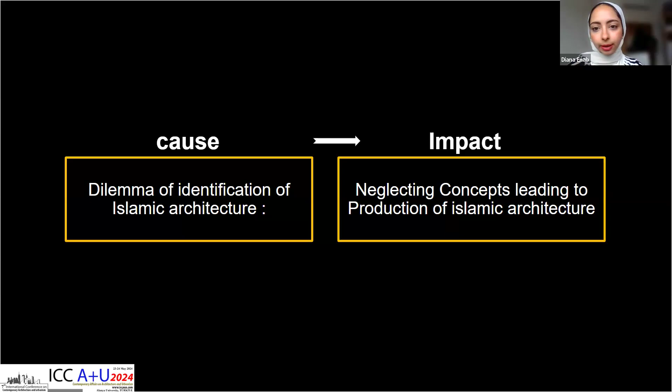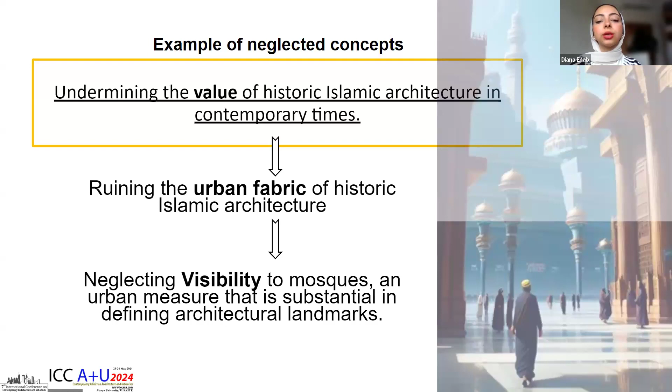So since we've got a dilemma of identification of Islamic architecture, this would assure having a negligence on the concepts leading to the authentic production of Islamic architecture. And an example of these neglected concepts would be undermining the value of historic Islamic architecture in contemporary times, which in other terms can be referred to as ruining the urban fabric of historic Islamic architecture. And among the urban measures, visibility comes to be substantial in defining architectural landmarks, especially to users and viewers of the space.

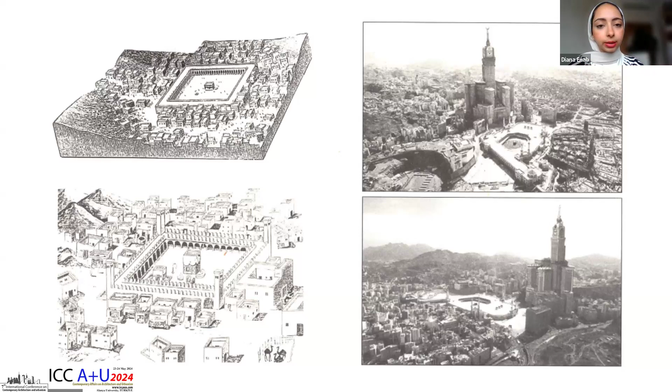And when we speak about visibility of mosques, it is inevitable not to mention the critical writings of Dr. Ali Abdel Raouf in his book From Mecca to Las Vegas, when he spoke about the transition of Muslims' priority from perceiving and getting closer to the Kaaba from the ground to overviewing the Kaaba from the top while accessing one of the highest towers located in its contemporary surrounding context. Similarly, the Galata Port Waterfront Development Project located in Istanbul is creating a visual barrier and preventing Nusratiya Mosque from its right to be visible from the coast.

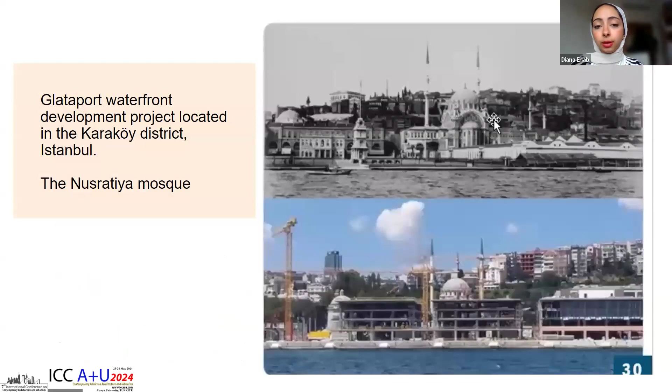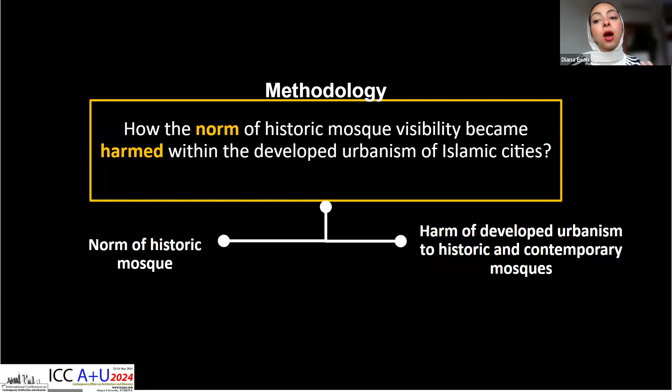So all of that comes to be wrapped up in a single question, which is how the norm of historic mosque visibility became harmed within the developed urbanism of Islamic cities. And in order to have an answer for this question, this study develops a comparative methodology of comparing the norm of historic mosques versus the harm of developed urbanism to both historic and contemporary mosques. And the case chosen for conducting the study is Nablus city, located in the West Bank. And the reason for choosing Nablus is because of its topographic nature that would alter the visibility of mosques in a radical way. So in this study, Al-Nasr Mosque is used as a historic mosque, and it will be compared with the contemporary mosque of Kawthar.

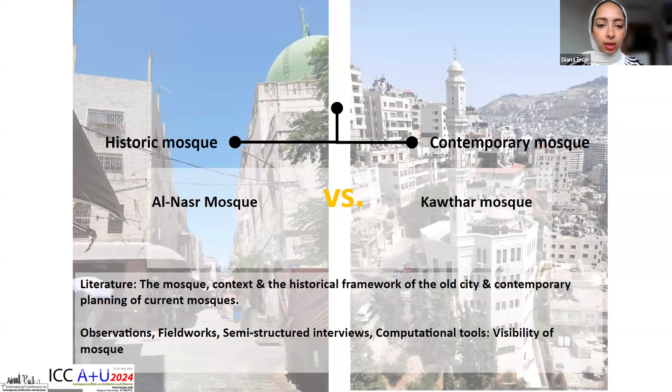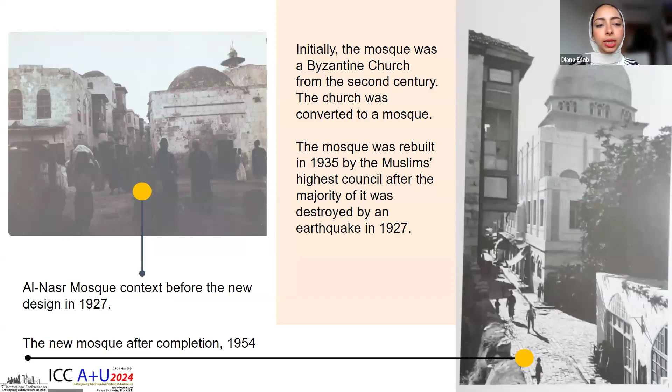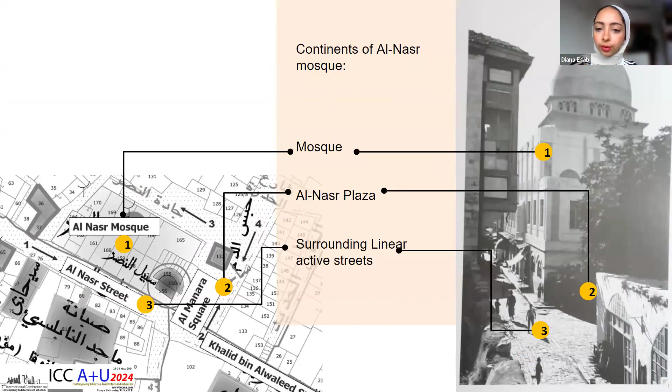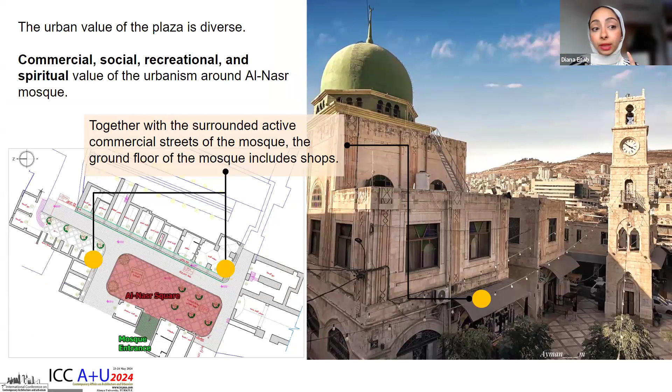So to start with, Al-Nasr Mosque is located in the center of the old city, particularly in Al-Qaryon quarter. Initially, the mosque was a Byzantine church, and then it was converted to a mosque. It became its latest form in 1954. And the contents of Al-Nasr Mosque are not restricted to the mosque itself as a building, but include Al-Nasr Plaza or Al-Manara Square in front of it, and it is surrounded by linear active streets. And the urban value of the plaza becomes diverse in that it includes commercial, social, recreational, and spiritual value.

So sometimes we see the square operating as an open-air prayer plaza or a public gathering place or place for school activities or commercial vending, etc. So the activity of the plaza and the activity of streets around the mosque, of course, would increase the number of viewers and create diversity in terms of views. However, due to the intactness and compactness of the urban fabric of the old city, the mosque visibility becomes restricted to the old city itself, and the visibility to the expansive fabric of the city becomes very shallow.

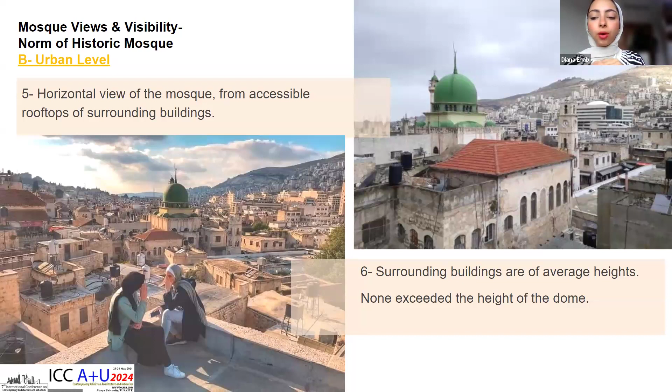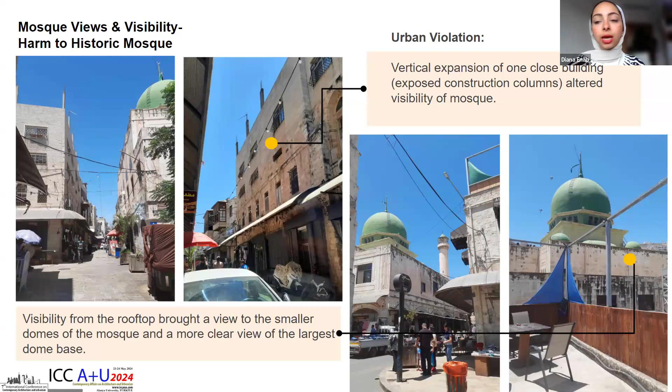In terms of urban level, the mosque gains horizontal views from the accessible rooftops of surrounding buildings, and those buildings are all of average height, so none of them would exceed the height of the dome. However, what caused the harm to historic mosques is the urban violations in contemporary times. So we've got the vertical expansions and the accessibility of some rooftops of buildings opposite and close to Al-Nasr Mosque, and that would alter the visibility of the mosque.

And in order to compare the results obtained from the observations, the fieldwork and the semi-structured interviews, they were compared with the measure of visibility using some computational tools run by plugins in the software Rhinoceros, specifically Grasshopper.

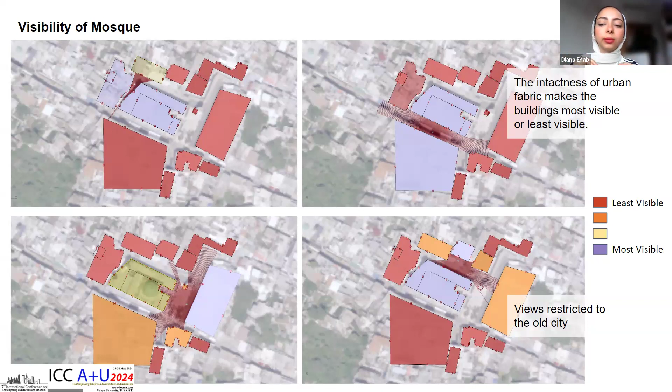So in this computational tool, four locations were pinned around the mosque, depicting its four sides or its four facades. And the results showed that the intactness of urban fabric makes the buildings either of most visibility or least visibility. It also proved the notion that views are restricted to the old city itself.

Another computational tool showed that the highest visibility of Al-Nasr Mosque is at its roof, thanks to the expansive contemporary urban fabric, and that the facade facing the plaza would be the next most visible facade in Al-Nasr Mosque.

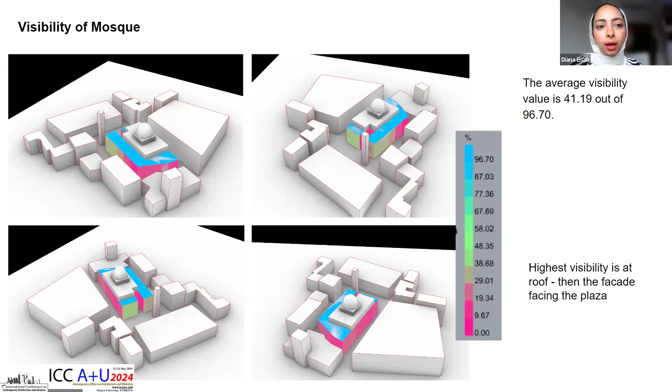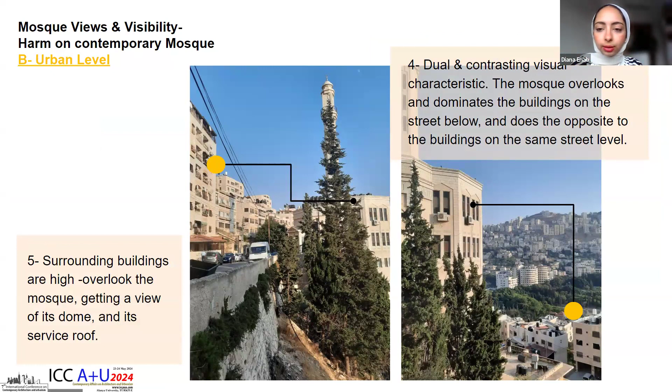Also, the lack of open spaces or plazas in front of the mosque would lower the visibility for passers. In terms of urban level, surrounding buildings are high and they would overlook the mosque. There was also something interesting to tackle, which is the dual and contrasting visual characteristic of the mosque. Sometimes it would dominate the buildings on the street below, and sometimes it does the opposite to the buildings on the same street level. So there's a contrasting dominance, I would say.

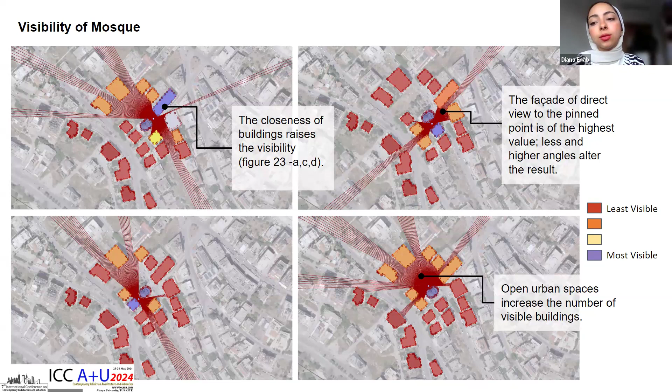Results of the computational tool show that closeness of buildings raises the visibility, and that the facade of direct views to the pinned points is of the highest value. Lower and higher angles would alter the result, and open urban spaces increase the number of visible buildings. This is a close-up on how the computational tool shows the result of visibility: it does not only evaluate the visibility of surrounding buildings to specific points graphically, but it also evaluates the facades of those buildings numerically.

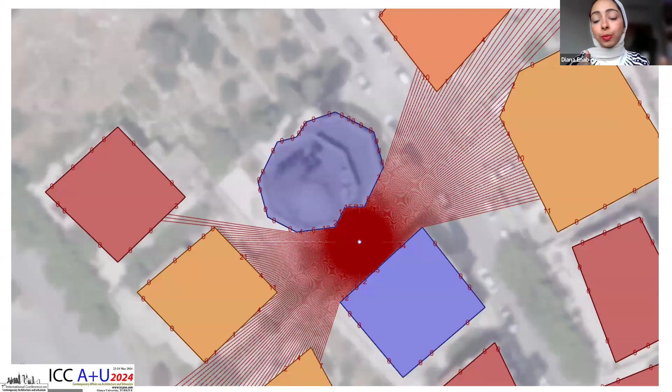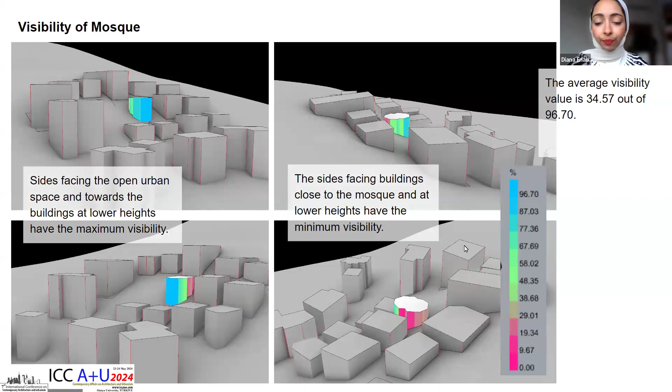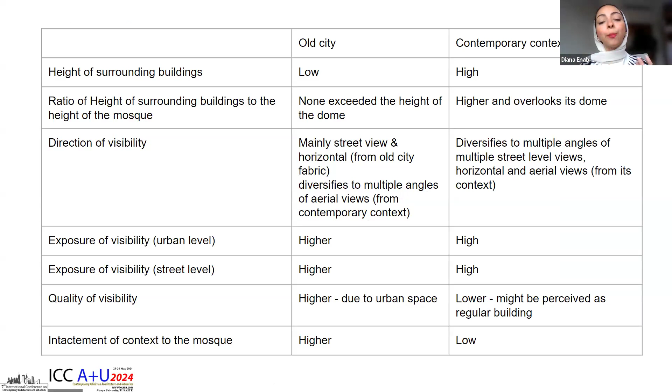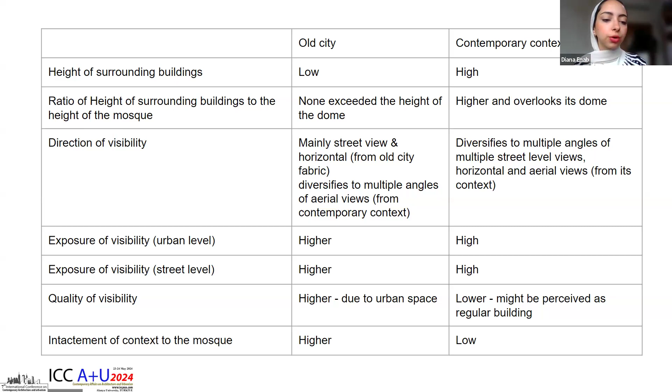Results also showed that the sides facing the open spaces and towards buildings at lower height would have maximum visibility, while the sides facing buildings close to the mosque and at lower height would have minimum visibility. And lastly, the comparison of contemporary and historic mosques drew on a couple of points: the height of surrounding buildings, ratio of height of surrounding buildings to the height of the mosque, direction, exposure, and quality of visibility, and intactness of context to the mosque itself.

The results of the study showed that the visibility of Al-Nasr Mosque was higher than Al-Kawthar Mosque due to the intactness and closeness of its urban fabric, and also because of its quality. In both mosques the exposure of visibility was high; however, the quality of the visibility was distinguished. The role of the majestic and grand mosque disappears in both mosques. The height restrictions surrounding Al-Nasr Mosque protect the general urban fabric of the old city, but are not a direct application of urban visibility conservation for historic mosques, and that was a gap.

We can say that the only visual attribute of contemporary mosques in general is either their green symbolic light at night or their minarets in the daytime. Unfortunately, other than that, they would appear as regular buildings if we remove the green light or the minaret. So that gets us to the conclusion that at the current time, most connections to contemporary mosques are auditory rather than visual, and this is to rethink the relation of Muslims to mosques: it shouldn't be only heard, but it should be seen.

And to wrap up with some general recommendations on the contribution to practice of a humane and Islamic architecture: Islamic values should be integrated and interpreted into better and more adequate physical measures. The sense of enclosure should be enhanced in contemporary mosques, and urban measures of mosques, such as building to street height ratio, building closeness and accessibility, should be rethought and restudied.